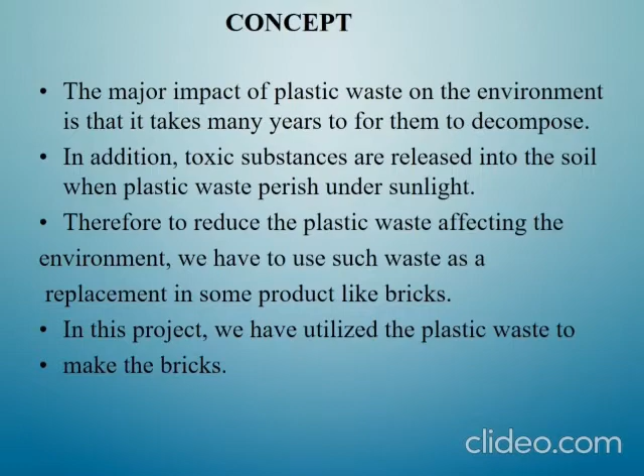The win-win eco bricks: people are asked to fill PET bottles of 1 liter or more with non-recyclable plastic waste, including wrappers of namkeens and chips. BMC is paying ₹10 for every kilo of such eco bricks. PET bottles filled with plastic wouldn't pollute the environment for hundreds of years. It can be used in making roads, benches, tables, tree guards, dustbins, etc.

It is the best example of good utilization of harmful waste. It is easy to make and will clean up surroundings of non-biodegradable waste. Now let's see how it is handled.

The concept of recycling and sustainability has been introduced to maintain the level of natural resources. Plastic is a very common material now widely used by everybody in the world. Plastic plays a predominant role in reuse in this era as it is compact and light in weight. Common plastic items used are covers, bottles and food packages.

The great problem with plastic is its decomposition. The solution lies in finding an efficient way to solve the problem of plastic waste. So we added this plastic waste into bricks and created the brick using plastic waste. It is most economical for the construction industry, and it is also an economical and environment-friendly solution for plastic waste.

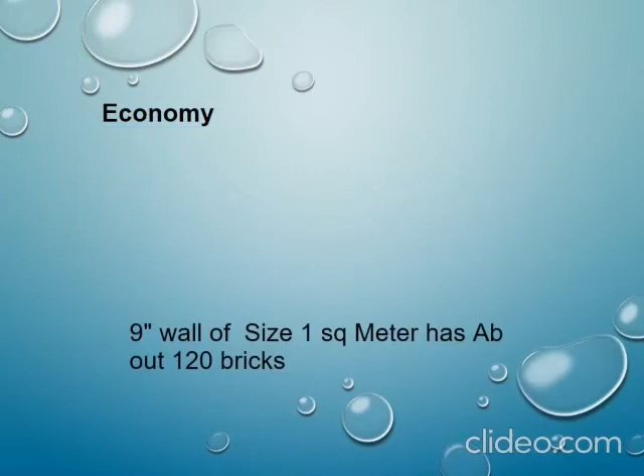Economy: brick price is near about 6 to 8 rupees per piece for traditional brick, whereas plastic bricks cost 2.5 to 4 rupees per piece. Cost of 1 square meter wall is 960 rupees for traditional brick, whereas plastic bricks are just 480 rupees.

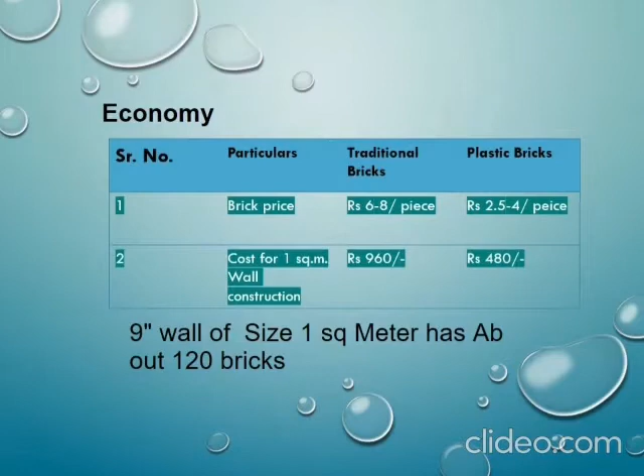Here's the methodology: batching, burning, mixing and molding. First of all, let's begin with the batching.

The collected waste bags are cleaned with water and dried to remove the water present inside the plastic, and it is weighed. The sand is sieved using a 600 micron sieve. The sand and the plastic bags were weighed in various proportions, among which the plastic was taken for the burning process.

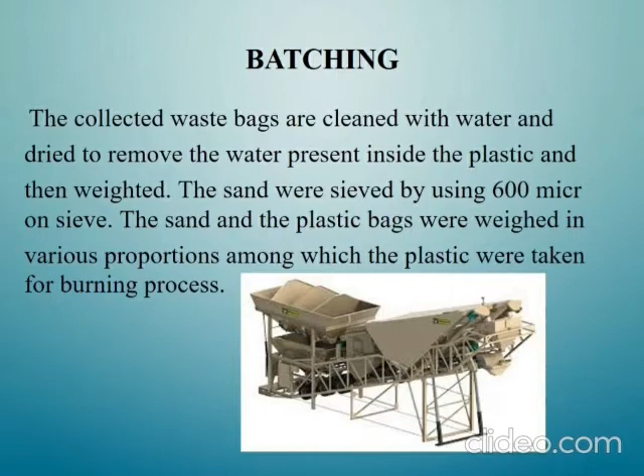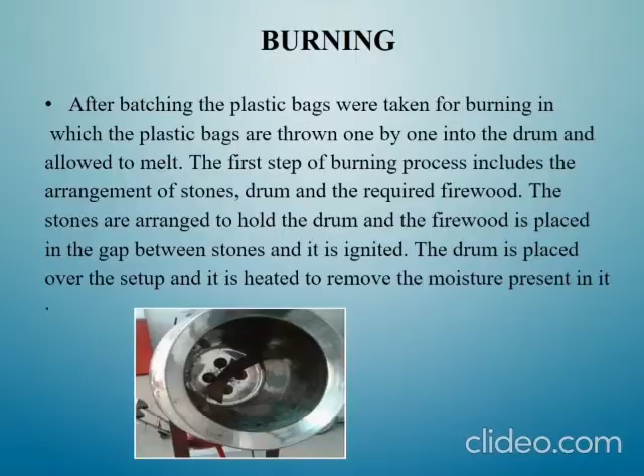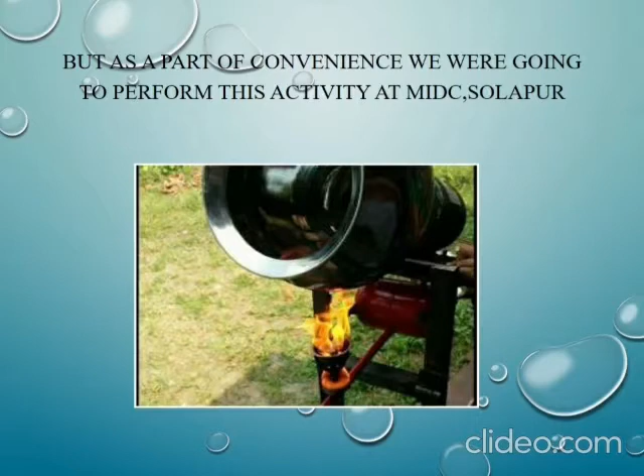After batching, the plastic bags were taken for burning, in which the plastic bags are thrown one by one into the drum and allowed to melt. The first step of the burning process includes arrangement of stones, drum and required firewood. The stones are arranged to hold the drum, and the firewood is placed in the gap between the stones and ignited. The drum is placed over this heat setup and heated to remove the moisture present in it. But as a part of convenience, we are going to perform this activity at MIDC Solapur.

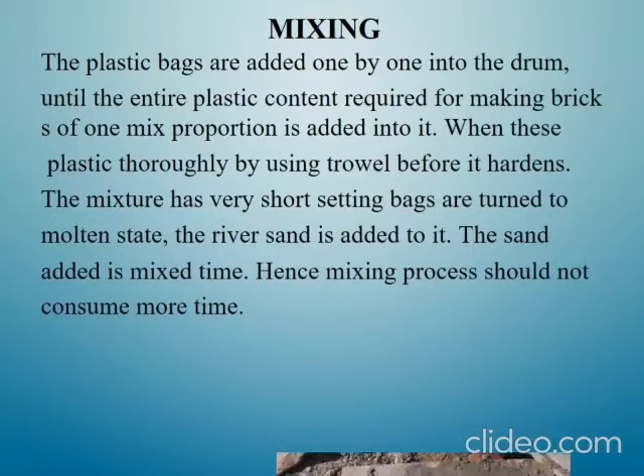Mixing: plastic bags are added one by one into the drum until the entire plastic content required for making bricks of one mix proportion is added into it. When this plastic is mixed thoroughly using a trowel before it hardens, the bags turn to molten state. The river sand is added to it. Since the mixture has a very short setting time, the mixing process should not consume more time.

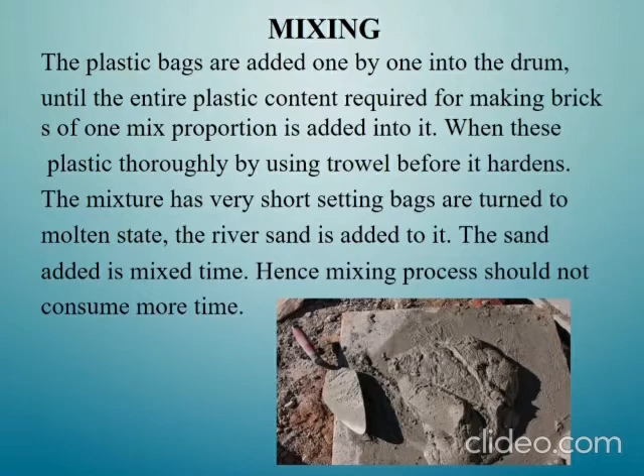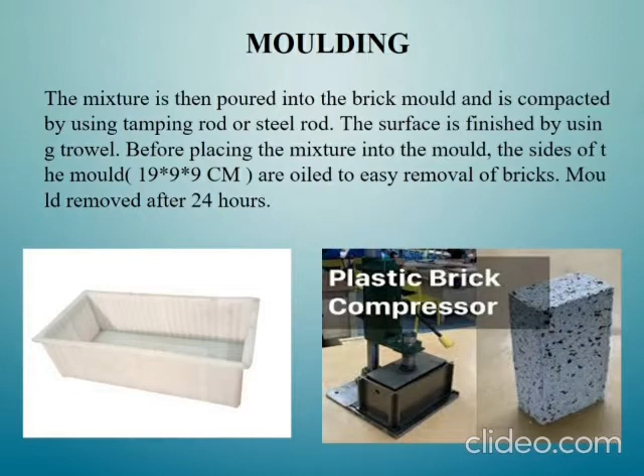Molding: the mixture is then poured into the brick mold and compacted using a tamping rod or steel rod. The surface is finished using a trowel. Before placing the mixture into the mold, the sides of the mold, that is 19 by 9 by 9 cm, are oiled for easy removal of bricks. The mold is removed after 24 hours.

These are the project outcomes. It develops an efficient way and effectively utilizes plastic waste, and most importantly, less wastage of material. Secondly, it reduces the consumption of natural resources such as clay for manufacturing of brick or tiles. It produces cost-effective materials which a common person can afford easily, as the manufacturing of this brick is cheap.

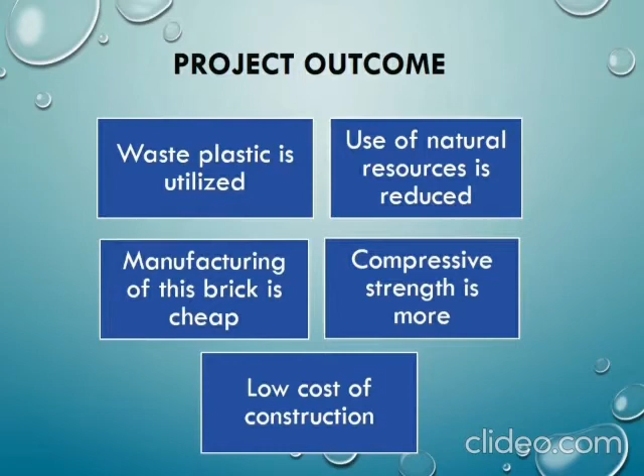By the research paper, it is proved that plastic brick has more compressive strength as compared to standard bricks. Lastly, plastic bricks are economic, so automatically it reduces the cost of construction.

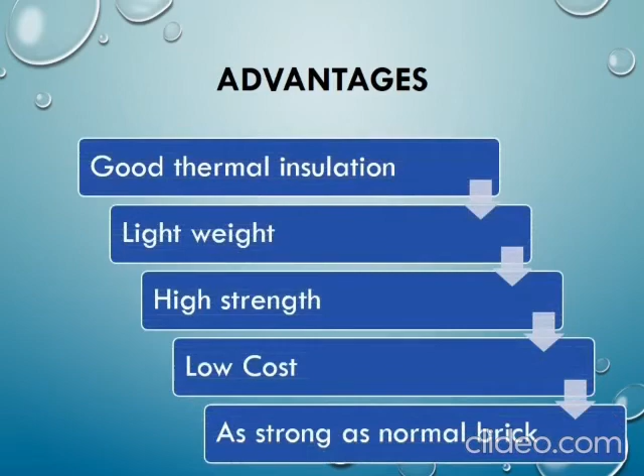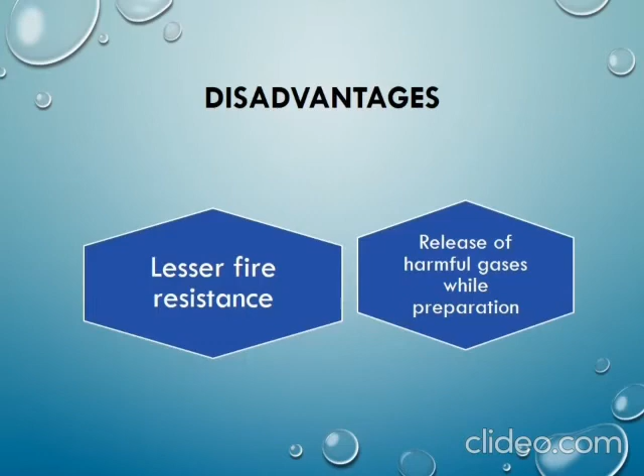In conclusion, waste plastic, which is available everywhere, may be put to effective use in bricks. Plastic sand bricks give an alternative option of brick to customers at affordable rates. Water absorption of plastic and sand bricks is 0%. Compressive strength of plastic sand brick is 5.6 Newton per meter square at a compressive load of 96 kilonewton.

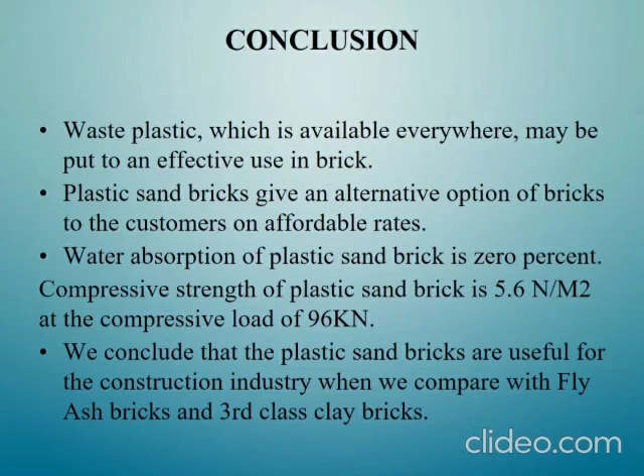We conclude that plastic sand bricks are useful for the construction industry when compared with fly ash bricks and third-class clay bricks.